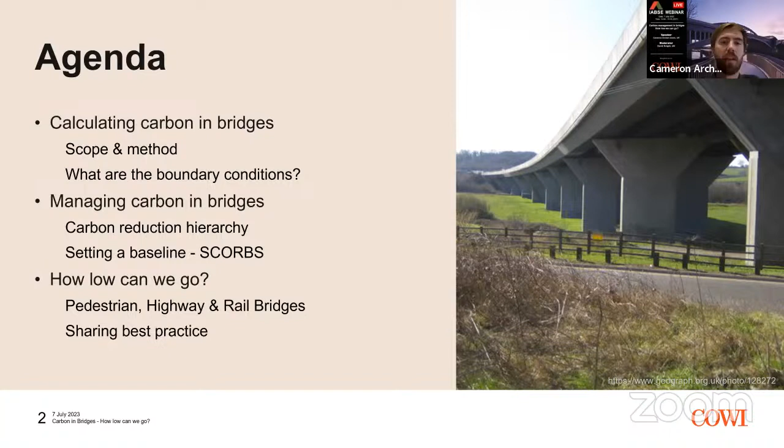The first topic is the fundamental ingredient before we can start to think about managing things. We need to have sight of what it is we're trying to manage. With the increased focus we have on this within our projects, we need to make sure we're doing it fairly and consistently, to see if we're genuinely improving and if options are better than one another.

The next few slides I'm going to present are a combination of COWI input material, but that overlaps with what I'm sure everyone else is doing, and certainly within the Net Zero Bridges group, what other groups and organizations are doing. Within that, we have a working group I'm involved in, setting out how to calculate carbon in bridges fairly and consistently. I'll give a reference to a guide we've put out, but then the extension is, what can we then do with it?

Just by way of one slide, to summarize what I'm talking about, I'm not going to go into a huge amount of the background detail on carbon calculations, but we'll leave that for references for people to follow up with outside.

Starting at the top left of this slide, the material manufacture and processes and energy use then lead to greenhouse gases. In a life cycle assessment framework, or LCA framework, which is the formal process underneath which this sits, the indicator that leads to is global warming potential, the unit of measure of which is carbon dioxide equivalents, or carbon for short.

When we look at our projects with our engineering hats on, the easy or most obvious part we can influence is the upfront carbon, which I've pulled out from the full set here. This you may have heard referred to as cradle to end of construction, which covers material manufacture, transport to site, and construction activities and wastage on site.

When doing a carbon calculation, as I'll present for a range of COWI projects, that's carried out by subdividing the bridge into components with a unique background material and/or process associated. Then taking the quantity from the design, multiplying it by an emission factor, gives you the carbon for that component, and then rinse and repeat across the whole bridge. The emission factor scope you choose is then linked with the life cycle scope, and you sum all those across the bridge to end up with your total project carbon emission.

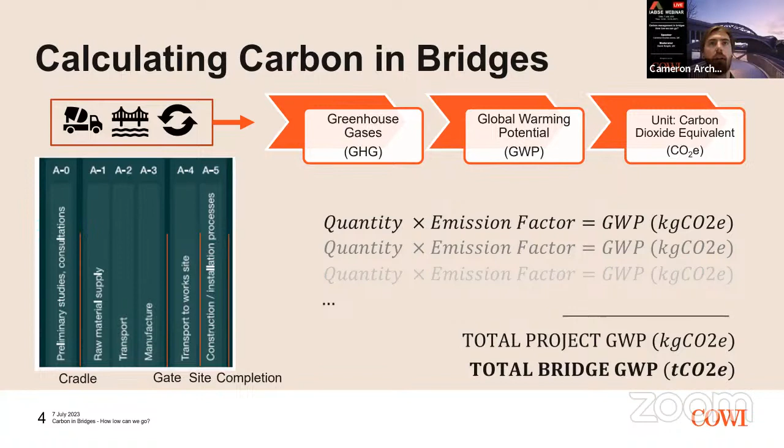So then how does that sit within the broader life cycle framework? I touched on briefly that it's part of this life cycle assessment framework. Here, again, I won't go into a huge amount of detail, but this is the breakdown of life cycle modules. We tend to use this terminology, talking about A1 to 5 or Module B associated emissions. The before use stage, or A1 to 5, is what we were looking at on the previous slide, highlighted in the blue box.

The next most relevant part, and increasingly becoming more relevant, is the use stage, when we will generally be involved as structural civil engineers, linked to the maintenance, repair, replacement, and refurbishment. That's the B2 to B5 in the purple box. Then the other one, which will generally not be within our direct control, but we can influence and need to be cognizant that it's there - it can be very significant - is the one in the green box: the user's utilization of infrastructure, B9. I've got a slide within the session to pull that out and tease out what we mean by that.

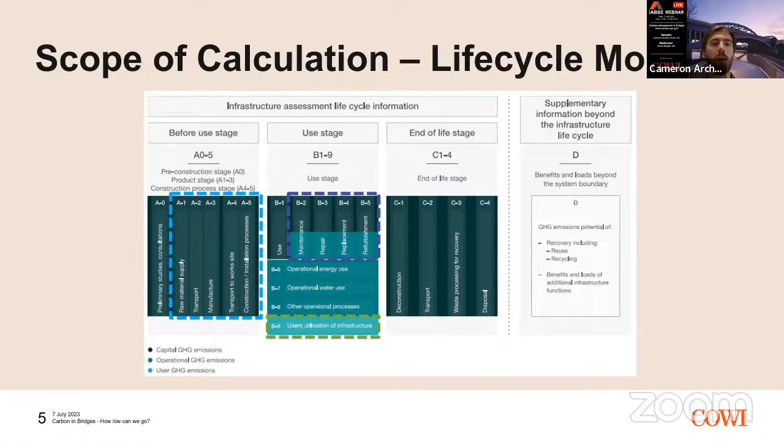So that's the life cycle side. When we talk about a life cycle calculation, we'll have a life cycle scope, broken down into these packets, and we should clearly say if it's A1 to 5, or whole life, or whatever it may be. Then looking at the bridge or the asset.

What I've presented here is a table that we've settled on within the Net Zero Bridges working group, for the minimum components of a bridge that should be included within a carbon assessment when using it to compare against another bridge - whether one within your own organization, or when comparing outside organizations, or comparing against a rating system, like the one David mentioned at the beginning, which I'll get to within this presentation.

So graphically, what does that mean? Looking to the right, that's everything from the foundations all the way up to the top of the structure, but it also includes the ancillaries on the structure. As bridge engineers, we may not have direct control, but we will influence the surfacing - in this case, whether it's direct fix or ballast. So the assessment should include the rails, the track slab, and the infill layer in this example, as well as architectural parapets and things that aren't necessarily strictly part of the structure, but are part of what we can influence and should be considering.

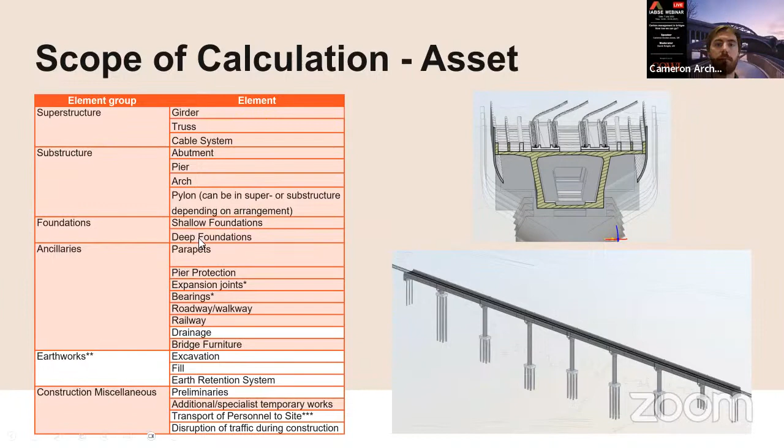The last point on the details is to refer anyone who wants more understanding of these carbon calculations, and how to do them, to these four references. I'd definitely recommend starting with the IStructE's guide on how to calculate embodied carbon. That's a comprehensive but broad enough view that anyone with an engineering background can start approaching this if coming at it from zero.

Linked to that on the right-hand side is a screenshot of the guidance note we published within the Net Zero Bridges group, now available on the website in draft form. It's up there for people to log into and use, and it specifically covers bridges. There will be parts that, obviously - if you're writing a guide trying to cover all structures, you can't go into as much detail - so this one tries to pick up and fill in those gaps, but follows the same framework.

The two on the left are, I guess, even another level above - looking at calculation methods for construction works in the standard, which sits a level above this and sets out an overall framework. And then PAS 2080, which I'll come back to - this standard is linked with management principally, but as part of the management, you need to have the calculations done with the appropriate boundary conditions so that it's compatible with how the guide works. So that's another important reference.

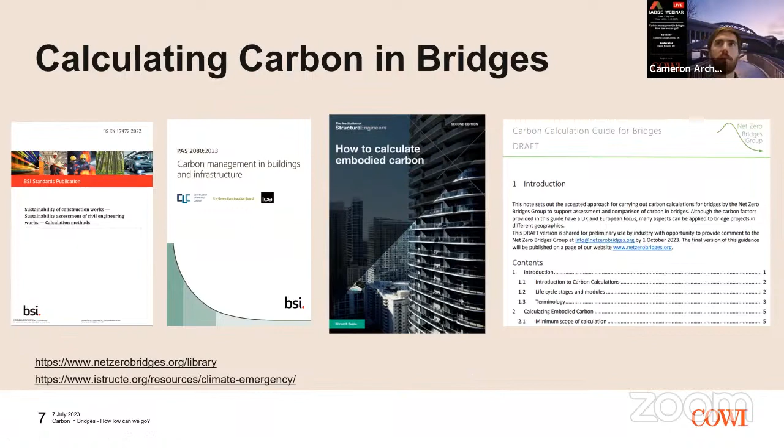So now we've got the details underway, let's have a look at some bridges. Starting with the one that's in the cover photo for this presentation: Duke's Meadows Footbridge. That's a design we've been developing within COWI, in collaboration with Moxon Architects, for Knights Brown Construction, on behalf of London Borough of Hounslow. It opened to the public earlier this year.

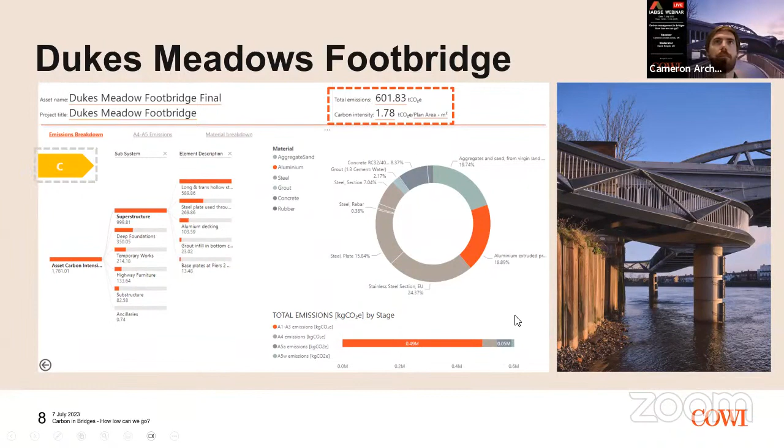So that's one bridge. Let's bring in a few more to get a feel for what we're talking about when we start talking about carbon in bridges. I mentioned we're operating in tons. Here I've gone up in a log scale - 100, 1,000, 10,000, 100,000 plus - and put a few bridges on there, just so people can get a feel for what I mean by total carbon.

Looking at these from left to right, there's a pretty obvious proportionality leading to those increased values. It's the size - starting at the left, the smallest bridge has the smallest carbon footprint. Stepping your way up, you get to medium to large scale, generally bigger bridges. The use is also changing, but I'd say when looking at total carbon, that's not going to have too much of a sway. It's really overall size we're talking about when we look at total carbon. That's a theme we'll come back to when we start looking at how to manage carbon.

To pick out one, on the far left is Floral Street Bridge in London, in Covent Garden. Over on the right is İzmit Bay Bridge in Turkey and Mumbai Trans-Harbour Link, both very big bridges.

So then how do we compare bridges between each other? We need to normalize. The functional unit we will generally normalize by is the functional deck area. If we do that, we can have a look at the carbon intensity, or the normalized carbon, in those same six bridges.

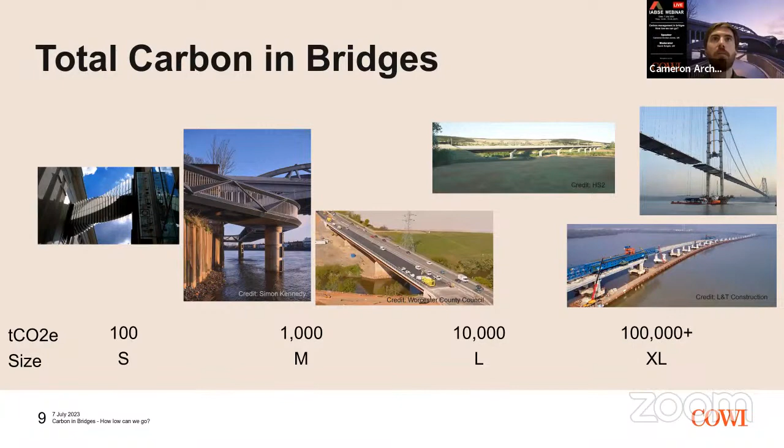I might just toggle backwards one more time. You can pick out one or two and follow it on to the next slide. You can see some of them almost completely swap - Mumbai goes from the far right to the far left, and Floral Street goes from the far left to the far right.

Picking out those in more detail, the cross-section or span arrangement for Mumbai Trans-Harbour Link adopts consistent repeated 60-meter spans for almost all of the crossing. So once you normalize, because you've got a repeated structure with a highly optimized cross-section, it follows that you're getting quite an efficient, or low carbon intensity, result.

Looking at Floral Street, in this case that was because of access and ability to maintain - it's manufactured with aluminium, and it has a very high architectural finish because of what it's connecting and who the users are. When you normalize per meter squared, it then gets penalized. Interestingly, once you look at it in this frame, it actually ends up about similar to İzmit Bay Bridge.

Touching on the ones that stay about the same, picking out İzmit Bay, the link is that once you normalize, you can start to look at things like what span does to carbon intensity, and what influence the primary construction material and construction method start to have on these designs. A common thread we've found is that there is generally a proportionality between span length and carbon intensity, to a point. Obviously, once you get to really small spans, depending on other factors like material choice, it may start to buck that trend a little bit.

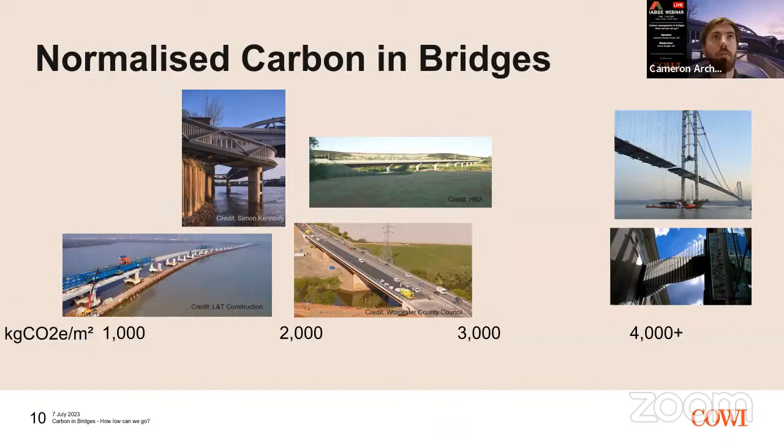Before we can start to look at how low we can go, I think any good engineering problem needs to understand its boundary conditions. So here I've pulled out just three common uses that we normally build a bridge for: pedestrians and cyclists,

highway bridges or roadway users, and railway. I've also lost a zero on the bottom here - we're talking a whole order of magnitude less at the boundary condition, starting from absolutely nothing, a nature path that's just carved out. Obviously there's nothing associated with it. As you start to build something for people to use, you then have some emissions associated.

These numbers I've pulled out from some data available online, and also from some high-level hand calcs for carbon per meter squared. So the numbers to keep in mind: for the footpath we're saying 10 to 150, the highway sort of 50 to 200, the railways 150 to 400. I've normalized them by meter squared to keep it consistent. Side note: normally for roads they're normalized per lane per kilometre, and for railways per kilometre of track length, but for comparison I've approximated them to a metre squared normalized parameter. So that's the lower bound.

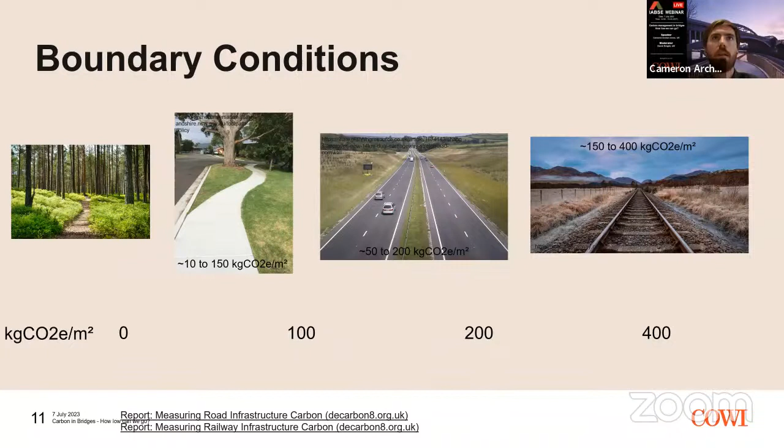The upper bound are these big long span bridges, right? We touched on this a bit with İzmit Bay. This here is a feasibility study we looked at for a connection between Scotland and Ireland, going back a couple of years now. These type of bridges set the upper bound.

The idea of presenting this is to put boundary constraints on what we're looking at in terms of a problem. I'll point out that for these type of structures, bringing carbon into the criteria to decide whether to build them or not just provides another metric to make sure, as a community, that the investment is worth the reward. So there's that extra economic layer that gets more complicated with these big bridges, and that's definitely a topic for another presentation.

But for now, I guess the upper bound, right at the top, is sort of 5-6 tons per meter squared for these mega long span bridges.

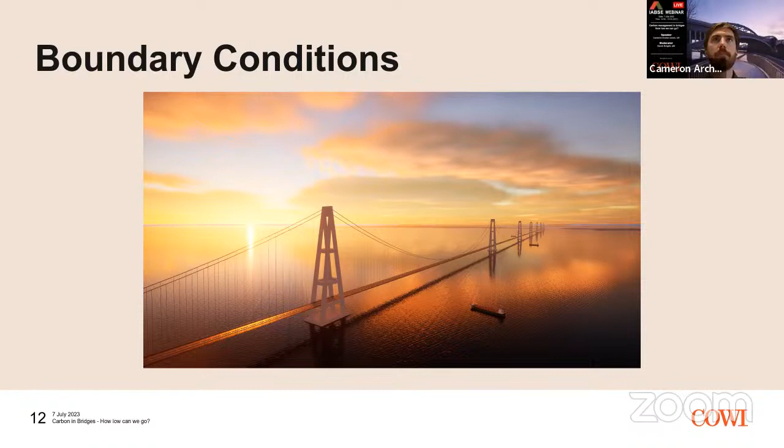Now that we've covered the calculating of carbon in bridges, how are we going to manage it?

I think it would be no presentation on management of carbon in bridges without deferring to PAS 2080. For anyone that has seen this before, this is the latest version that came out in April this year. This process flow diagram summarizes the overall intention of the standard. I'm not going to lose too many viewers by deferring to this standard - I'll admit the content is a bit dry, but the importance of standards like this can't be undersold.

Written in a way that gives a client a route to procuring low carbon is very important, right? So this standard balances the need for it to be possible to write into a contract, into clauses and things like that. It balances that side very well with acknowledgement that projects have their own constraints, and that setting targets and how often it's monitored and assessed

is up to the user to define - I'm talking about carbon in bridges, how often that's monitored and what scope you consider. So it gives you the framework and the tools, but it doesn't tell you how to do everything. It allows the project to respond based on the constraints that it has. That's why I think it's particularly useful.

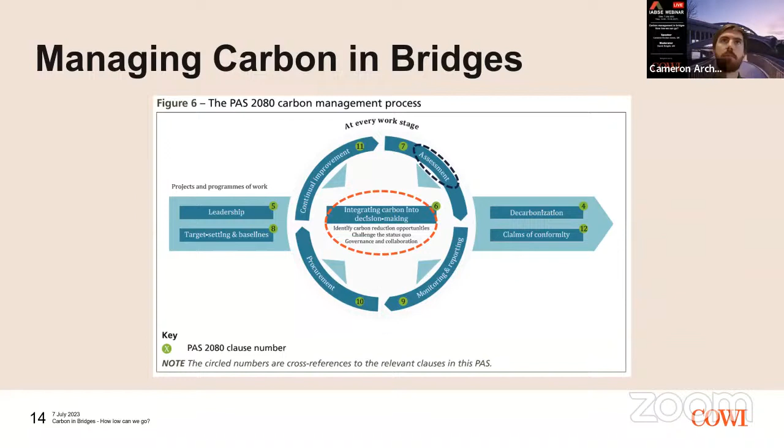Once you have assessed your carbon and you're looking at your project, how can we then look to reduce it in a systematic way? That's where something like this carbon reduction hierarchy can step in and help.

There are a few different iterations of this, and I'll acknowledge that the latest version of PAS has slightly different wording to what's here. This one is again taken from the iStructE content, and I think quite well links in from an engineering perspective what we can do to minimize carbon.

It follows, under the use less stuff banner, which I think Will Arnold is turning towards use less new stuff. We're talking about build nothing, build less, build clever, build efficiently - which are also what was in the previous version of the PAS - and then minimizing waste. I'm going to step through these in more detail in the next few slides.

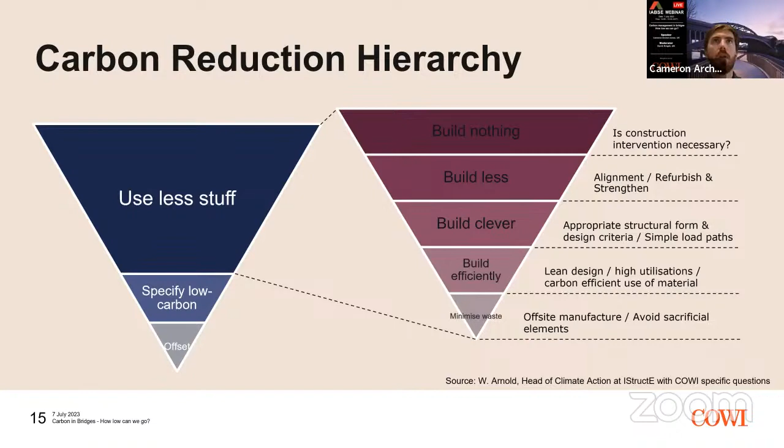So once you have a target, how can we answer some of the technical questions around reusing existing material and ensuring we have the most efficient load paths and things like that. That's where Design for Zero is a very good starting point for anyone trying to systematically consider the technical reduction opportunities on projects.

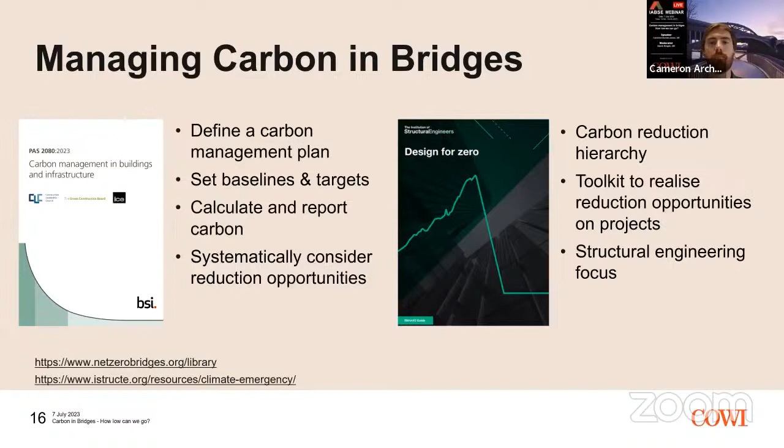Coming back to our reduction hierarchy and talking in a bit more detail - this diagram, I appreciate, comes up in many forms, and generally this sort of similar trend is the same with cost. But in terms of carbon, our biggest influence is at the beginning. The first question we should be asking ourselves is, can we build nothing? Is maintaining something that already exists an option? Is the route really needed at a system level? Those are the sort of questions we're talking about, which in some contexts you could dismiss within 5 minutes, but in others they're well worth investigating. It's just that in this hierarchy, we should take the time to pause and ask that question.

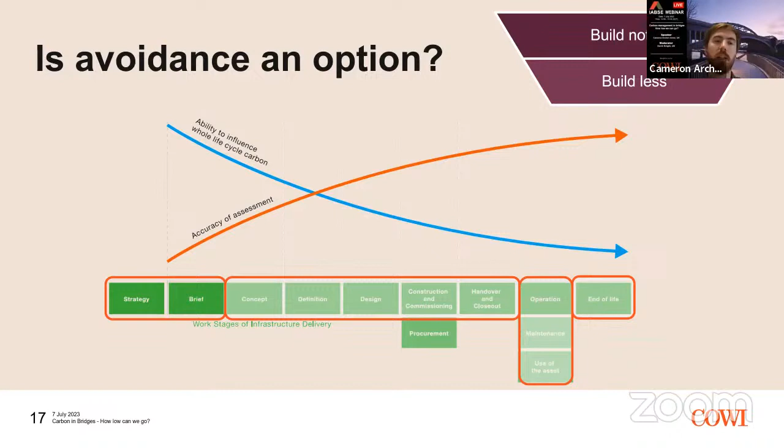Once we have to build something, then we need to think about what's the smallest thing we can build. At this point, I'll revert back to that previous slide about total carbon, where there's a clear link between the size of the bridge we're talking about and the total carbon that's in it. That's something not just from our bridges, but from other net zero bridges group members - that's a clear conclusion we're seeing. A good paper on that is one by David Collings, if anyone's interested in reading that.

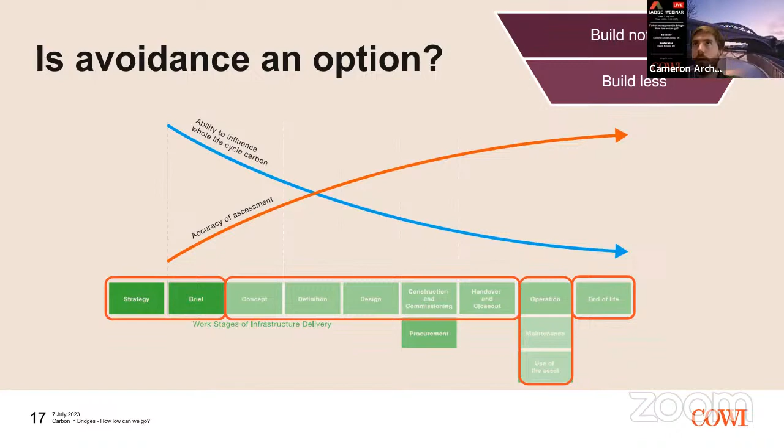However, let's have another little side note on when it would not be appropriate to build less or build nothing - just to make sure that when we're approaching a design, we're choosing the right thing. This is where we start to look at the network level impact of bridges within the transport infrastructure context. I've got two examples here that I'll spend a little bit of time on. Starting with the left, I've picked a spot randomly from a satellite image in South Australia. Obviously the users on the roads will be very different in this place versus where this consideration might be more important, but the geometry of it works quite well.

So let's say we want to get from A to B as part of a new transport link, but we have this extra geometry where, depending on the alignment, it does also influence the bridge length. I'm obviously simplifying a lot of other aspects that go into choosing the appropriate alignment. But for the purposes of managing carbon in bridges, you can see that for a certain point with a certain number of expected daily users, there will come a point where it may not take very long for the average traffic emissions associated with users of that bridge to offset the increased capital carbon that the bottom option might have.

This here is the quickest route, and it has the longest bridge, so generally you would expect this to have the higher carbon of the alignment options. So I guess the point here is that at that network level, there are considerations where sometimes going with the shortest bridge that may take a longer alignment might not be the right decision in a whole life carbon sense - and again, caveating that carbon is one criterion within a broader set. So that's that one.

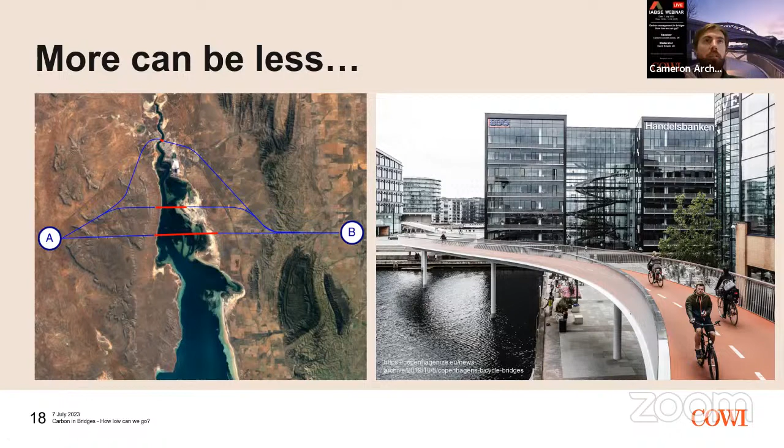Those cases aside, we will now look at, when we set the bounds of our bridge, how can we look to build clever and build efficient? So now we're operating the next level down. We've got our alignment, we've got our total bridge length defined. This is where something like this rating system that David mentioned in the introduction can come in.

I'll introduce a bit of the background, but the article's linked if anyone is interested. It was developed with myself and Dan Green, taking a lot of inspiration from what had been done for buildings, in the sense that it provides a very clear, very intuitive rating system that immediately alerts the user: are they doing well, or is there a constraint there that's driving a carbon outcome that should warrant a bit more investigation? That's what this rating system is trying to do.

It's trying to help people baseline. It's trying to help people achieve lower carbon outcomes through an easy to understand metric. So on the left-hand side, this is the same number we were looking at before. This is that kilos of CO2e normalized per functional square meter of the deck, with a nice colored rating that matches what you might see on your white goods, and increasingly getting used in more applications.

And this, in terms of the carbon reduction hierarchy, as I say, we're talking clever and efficient now. So we've got the total length.

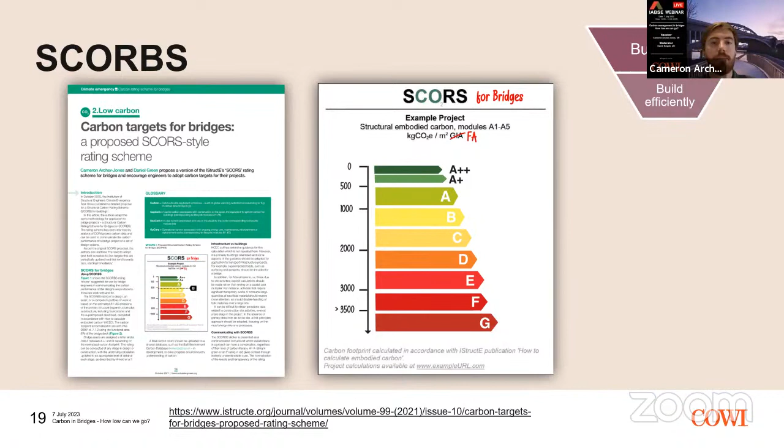The stages of a project where this will come in probably influences more of the people on this call, in that it's where we will generally spend more of our time when we're starting to develop a concept, starting to develop the design, look at the detailing, how it's going to be built. That phase in the middle is where this sort of system can really come in and help support decision making.

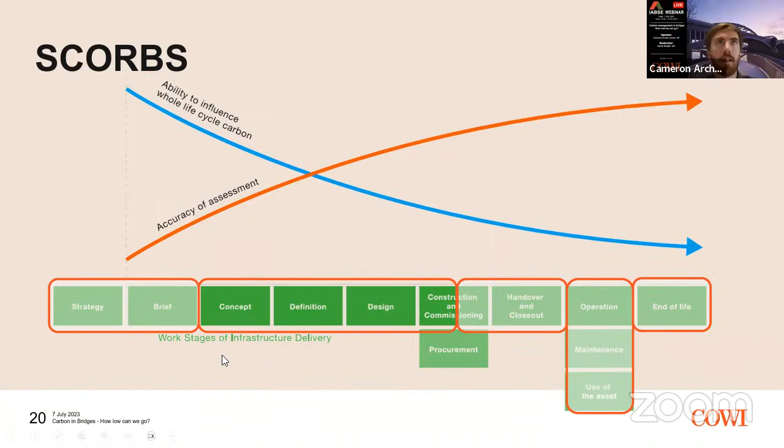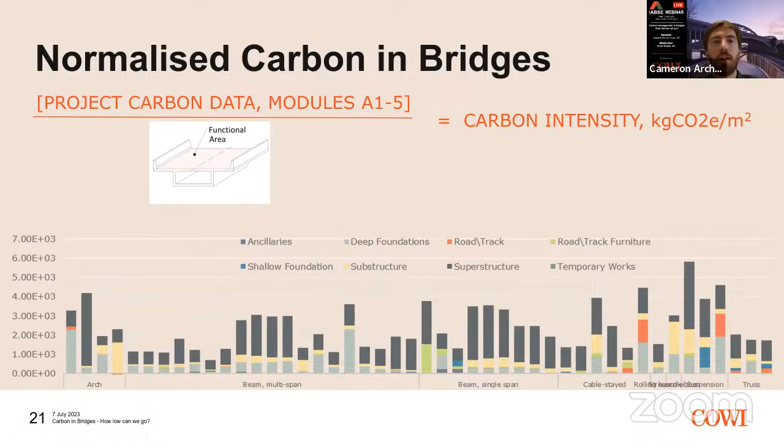The last point on SCORBS and how it can influence carbon management is that it's set up so that at the time when we put it together, the average carbon intensity of the bridges within the database was at a D to E boundary. It was set up so that there was room to go down and measure if something's more carbon intensive, but also gives plenty of scope to go up, with the idea being that by 2030, average or minimum target, we're looking at a B. Your average coming out of a bridge office or a portfolio is B, and then towards 2050, A+, getting down to as low possible carbon as we can.

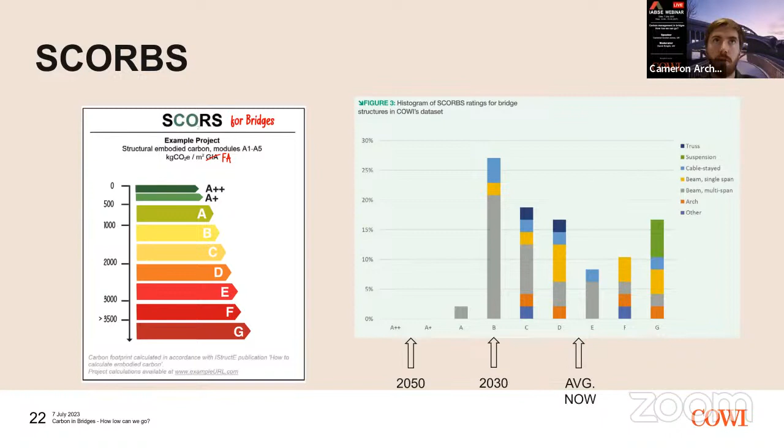So with that, I can now pull everything together and answer the question you've all come to see: how low can we go? I've specifically focused on current practice here, and in the Q&A we can pick up on what that might look like in the future. I'm happy to take input from others, particularly if you're more familiar with some of the decarbonisation route maps that are out there.

Starting with a footbridge, the example I've gone with is Hampton Footbridge, which I've spoken about previously, firstly because it uses the rating system exceptionally well, and secondly, with having adopted an A+ as the aim within the joint design team of engineer and architect. This is a COWI and Moxon design development. With that early establishment of the target, and the same team being kept from a similar scheme previously, they were able to look at the previous one for a similar bridge and take all the lessons learned, adopting a target from the outset, back when the design was just a line on the page of a possible crossing.

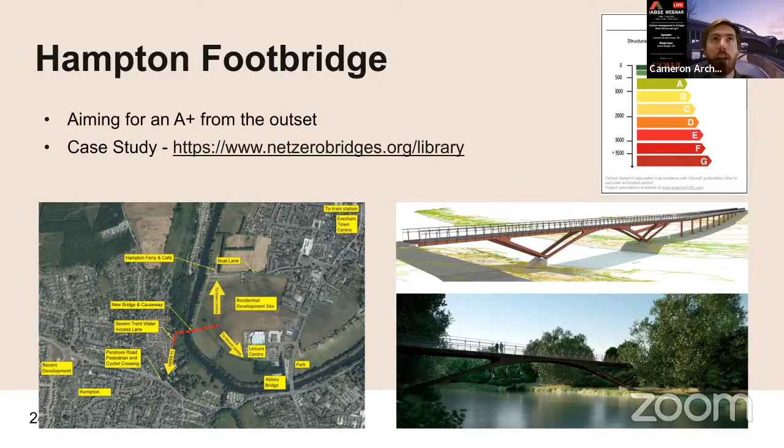Underneath the pedestrian banner, we also had a set of the Bridges to Prosperity quantities for one of their bridges, and I thought, for fun, for this presentation, what do they come out as? For anyone unfamiliar with Bridges to Prosperity, they're a charity that builds rural footbridges in developing countries. The particular focus here is a bridge they built in Rwanda, I think a Bechtel bridge, for the quantities we had available just from searching online.

So their current practice, from our rough calcs, comes out at about 420 kilos per meter squared, which actually surprisingly is not too far off what we're looking at for Hampton.

But if we were to apply some of the other things we'd then put on for bridges here - if we looked at maximizing cement replacements, obviously another whole discussion onto itself - but just to say how low could this one go: if we looked at cement replacement in a similar way to what can be done for bridges here, and also surmised that perhaps they could use solar photovoltaics for 90% of their power on site, still leaving 10% diesel, and then used recycled rebar from a similar source to European suppliers, it actually gets down as low as 190 kilos of CO2 per meter squared. A nice example.

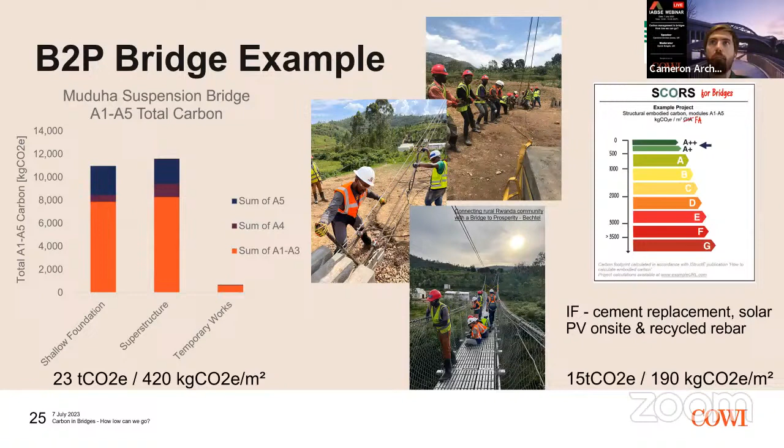But I think if we come back now - obviously we have our pedestrian bridges, but then what about a road bridge? How do we stack up when it comes to getting as low as possible on a road bridge?

I already mentioned the Mumbai Trans Harbour Link, which is also a strong contender for setting this lower bound for a highway bridge. But at the other end of the scale, I've picked out Honey Monster Bridge. This COWI bridge finished midway through last year or the year before, a COWI Moxon bridge for Knights Brown. Taking the embodied carbon A1 to 5 for this bridge, it comes out at 840 kilos per meter squared, resulting in a strong A in this SCORS rating system.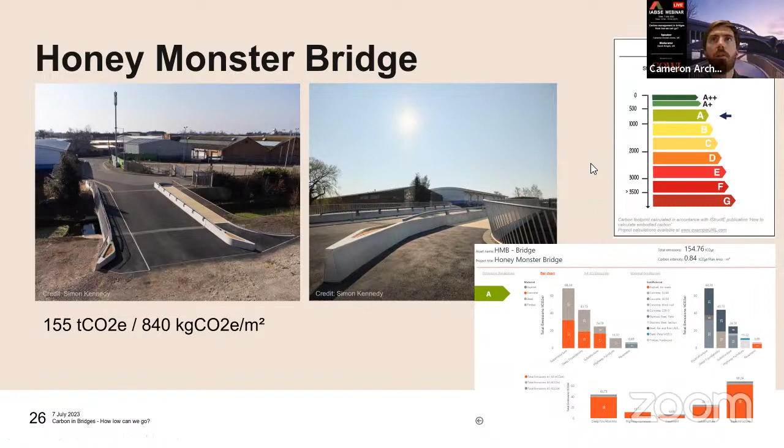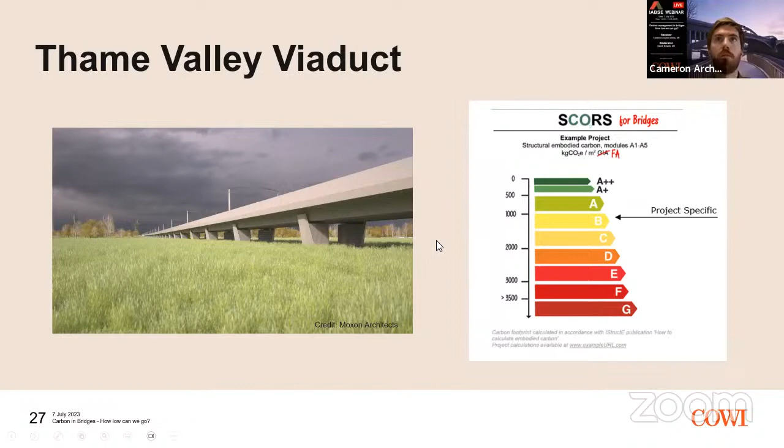What about if we jump up another step in the scale? The last one I wanted to talk about in terms of new bridges is Thame Valley Viaduct on HS2. This is at the other end of the scale from those smaller bridges. It's about 880 meters long, two tracks of high-speed rail line for HS2. This scheme is currently being constructed, and again adopts the mantra of minimizing material use as much as possible from the top down. There are also extra benefits in the minimized waste category with the large scale precasting being done. This one comes out at about 1.3 tons and gives a strong performing B rating on the scale.

Picking out some aspects of this project, it adopts expected average concrete mixes with 25% GGBS over the structure, and uses the UK CARES average for embodied carbon in reinforcement bar. One interesting point is that this is a series of short spans, repeated, with a highly optimized cross-section. The substructure actually has a higher component than the superstructure, which is not generally all that common. As spans get smaller, the substructure has a larger proportion of the total carbon. This is partly, or mostly, linked with the ground conditions, but it's an interesting side note from this study.

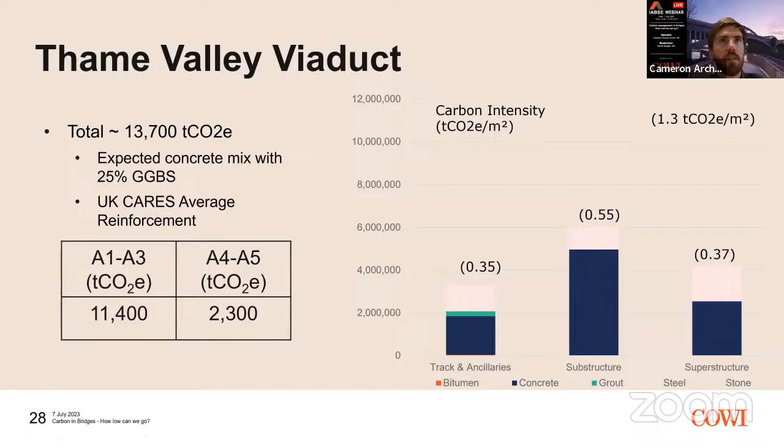But obviously these are all new bridges, and I've probably given it away a little, but the lowest carbon bridge is obviously one that already exists. This is Clifton Suspension Bridge, and it follows on from a study we recently finished and wrote about in the IStructE about what the user-associated emissions are with that. There's information on some key conclusions about managing maintenance and what that does to traffic, but I'm focusing more on the pure structural engineering point of view.

In terms of maintenance, this comes out to about 3 to 4 kilos per meter squared per year of embodied carbon from what we had available as the long-term asset owner, which in the context of getting to 2050, if we say about 25 years, that's 75 to 100 kilos of CO2 per meter squared to get there. Bringing it back to aligning with roadmaps at a broader industry level, that aligns with when we should have available lower carbon materials, lower carbon processes, all those sorts of things. It flips around the context a little as to how we can think about keeping what we already have going as long as possible.

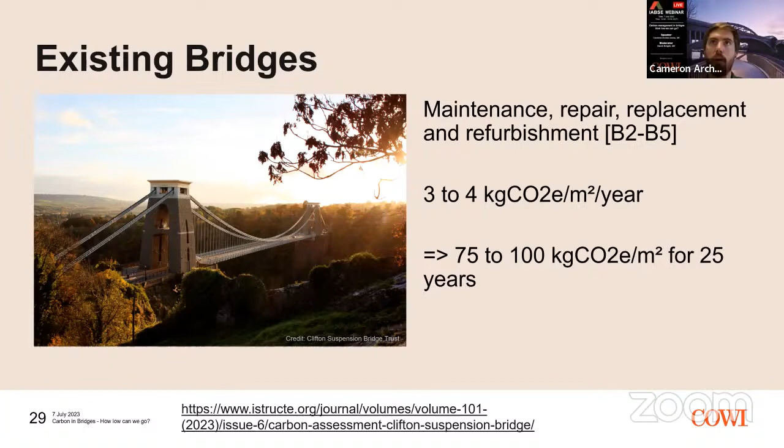The last slide from me is really to open up and ask for people to share. I've presented a series of examples on low carbon outcomes, but I'd be extremely interested to hear from everyone else. How low can you go? What are your minimum carbon outcomes? What were some of the key decisions and constraints that allowed you to get to very low outcomes? This is an industry-wide challenge, and sharing best practices is the core of what we're trying to do at the Net Zero Bridges Group.

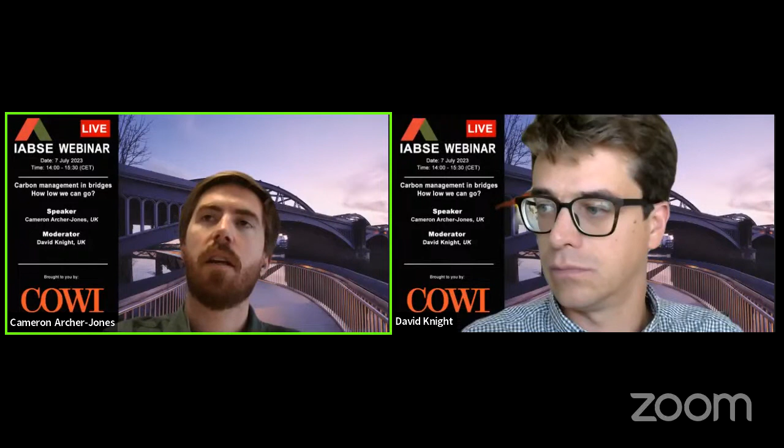At a very high general level, if I was tackling a new project, the transition point for cost between, say, a concrete cross section or a steel-concrete cross section, from what I tend to see in the data, tends to happen at a higher span length for carbon—so concrete tends to be the more efficient option. Very generally, there are so many caveats, but that's something on material use for the superstructure. A concrete cross section in the UK from standard suppliers tends to perform a little bit better and push that balance point for steel out just a nudge.

Other things we generally notice—span is obviously the one that's easy to come back to, and we do influence it. Overall size: definitely the bigger the bridge, the bigger the carbon, almost always—there have to be some quite extreme scenarios for that not to be the case. In terms of intensity or the actual numbers? No, sorry, I was talking total numbers. Intensity, no, I wouldn't say.

On the data, we see the smaller the bridge, the bigger relative influence the abutments can have, which then depends on how it's interacting with whatever it's around.

So if you have big abutments but a short span, your intensity sort of goes up quite a lot because you're normalizing. Question here: is there a significant difference in outputs depending on what measure you use?